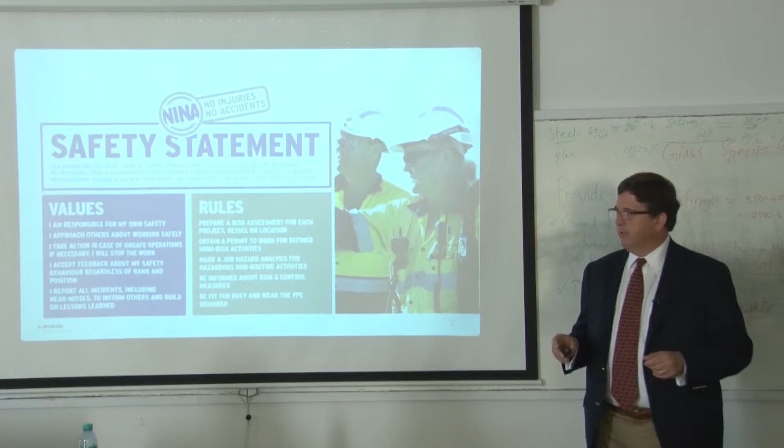Safety, of course, is important. All the dredgers, consultants, and clients emphasize that. You heard a little about hydrogen sulfide—when you get to the very contaminated material, you're also dealing with chemical risks. So one of the things we like to do is prepare a risk assessment for each project, actually looking at the activity you're going to do. The dredging has its hazards, but also when you do the treating, you want to make sure that as you're spraying the material in, you don't create an aerosol, something that can be breathed or absorbed through your eyes. These are things we get our safety people involved in, to really study with the engineers and the people doing the work. You get some of your best information from those actually doing the activity, to create a real safe environment while we're doing the projects.

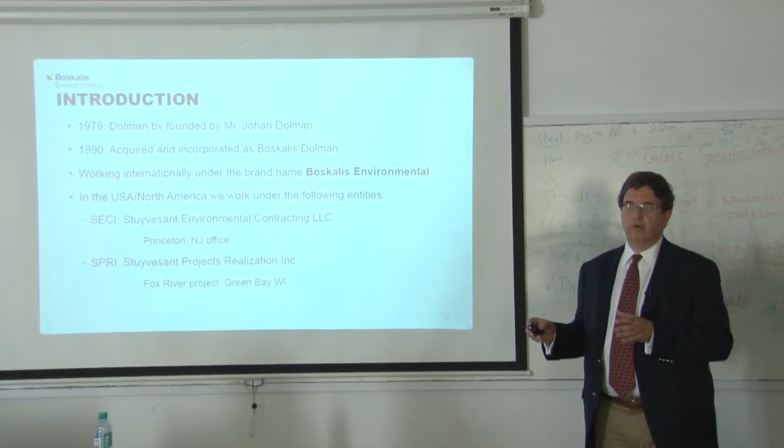A little background on us: we've been doing this for a little more than 30 years. Many know Boskalis as a worldwide dredger, but the focus here is really the group I'm in, the environmental group. In the United States and North America, we operate as Stuyvesant Environmental Contracting, or Stuyvesant Projects Realization. We're a specialty subcontractor solely handling the processing of contaminated dredge material—not dredging it on a particular project or tender. We team with a dredger, typically a water treatment company, and somebody to handle the ultimate disposal of the material.

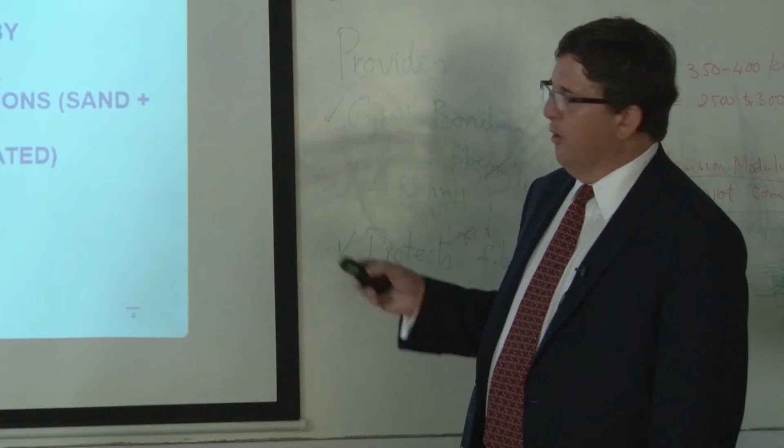The overall objective with contaminated dredge material is really to minimize the contaminated fraction. Both Renee and Tito pointed out that the material concentrates in the fine particles. So if you have a chemical engineering or civil background, the geotech properties are even more important to us than the chemical properties of the sediment—because once you look at your grain size analysis or particle size distribution, your highly contaminated materials stick to the fine surface area of the fine particles. That's the material that typically has to go for further landfilling, incinerating, stabilizing with cement, or chemical oxidation as you heard. So what we really try to do is physically separate the coarse material—the sand and gravel—and try to beneficially reuse it. I'll give some real life examples of how we've done that.

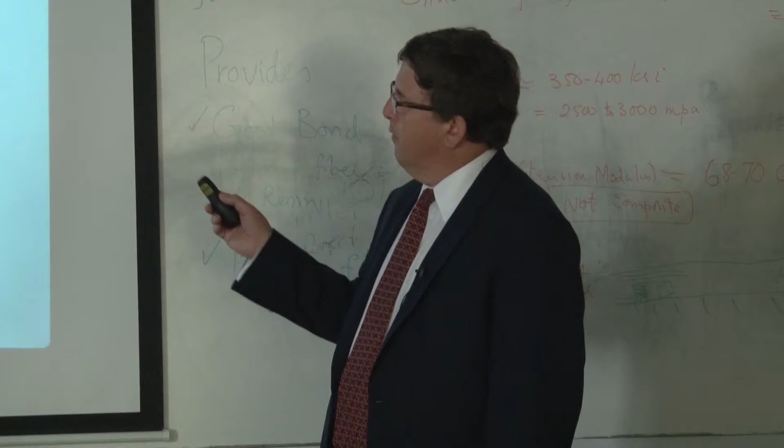Some of the ways we implement this technology: on a regional location where we have a lot of experience—in the Netherlands, being a small country, there's actually legislation preventing you from landfilling. In the US, we have large problems; we've got lots of land, we put everything in the ground, and that mindset is changing. Doing work in Canada, they're also looking at the sustainability of loading trucks and sending them through cities to distant depots or landfills, trying to see how much material can be recovered and beneficially reused on a particular project. We also get involved in specific design—looking at feasibility studies, like many of you consultants, the actual construction, and making it compatible with other technologies.

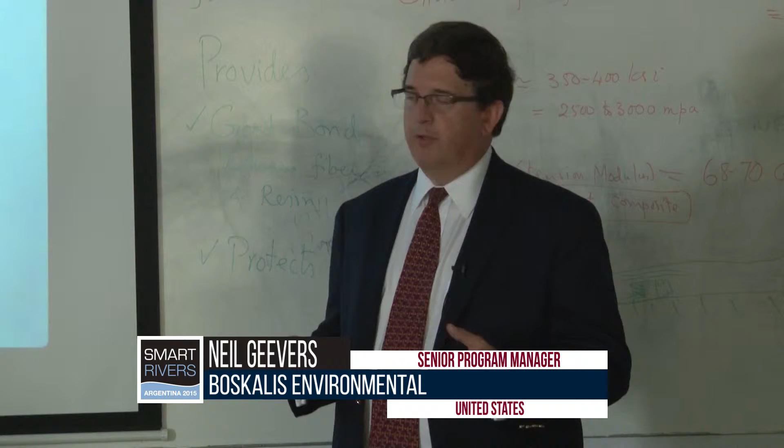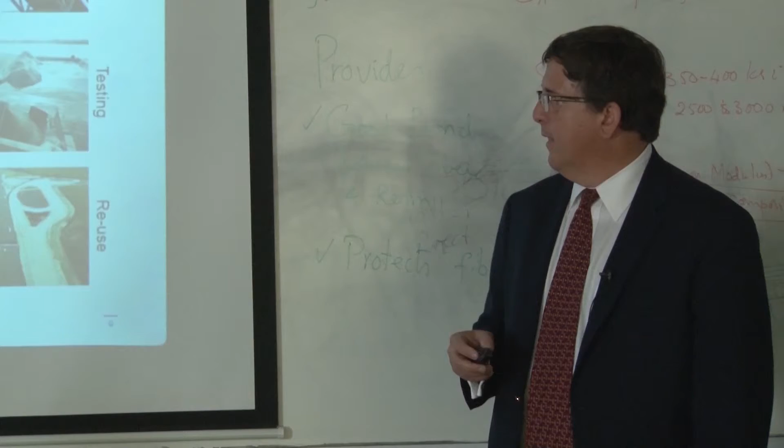It's a simple physical technology, and I'll touch on the actual techniques. This is a regional management facility—we have one in the Port of Rotterdam, in Schiedam, a facility that's been there for 20 years, where basically we accept the materials. A lot of our background came from soil management—treating soil from excavations of construction projects, building new highways, et cetera.

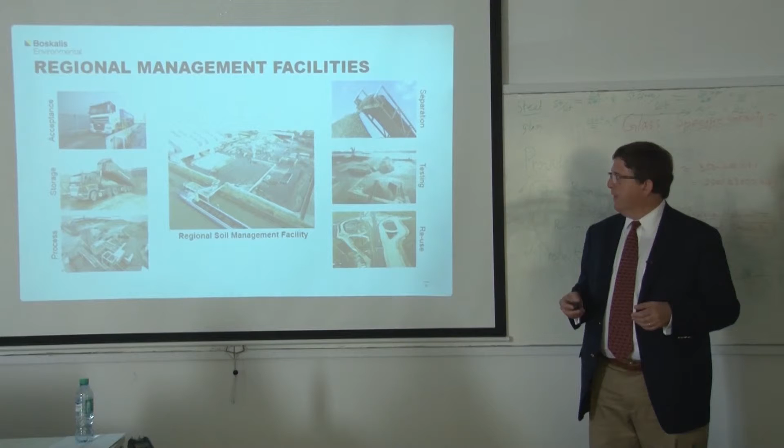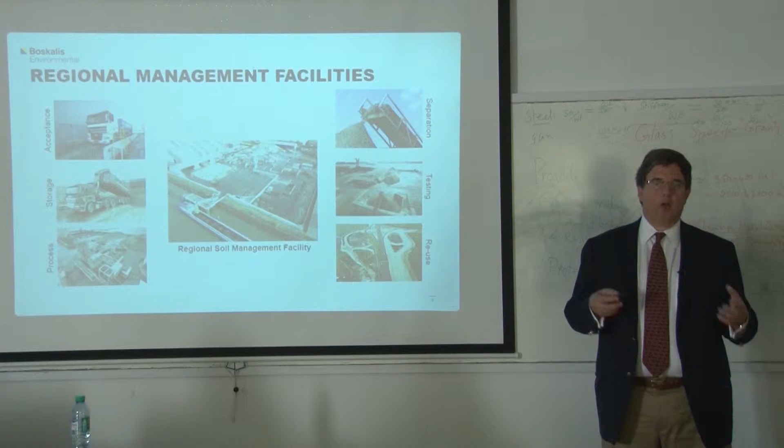And then again, recovering the sand. In the Netherlands, these are valuable commodities. Instead of sending stuff to landfills, the legislation actually encourages you to first look at reuse. Many countries talk about that, but there it's a real proven fact that first you want to try to recover the material. This includes separation steps, testing, and then ultimately being reused in a project, whether it's on the A4 highway or in a construction project.

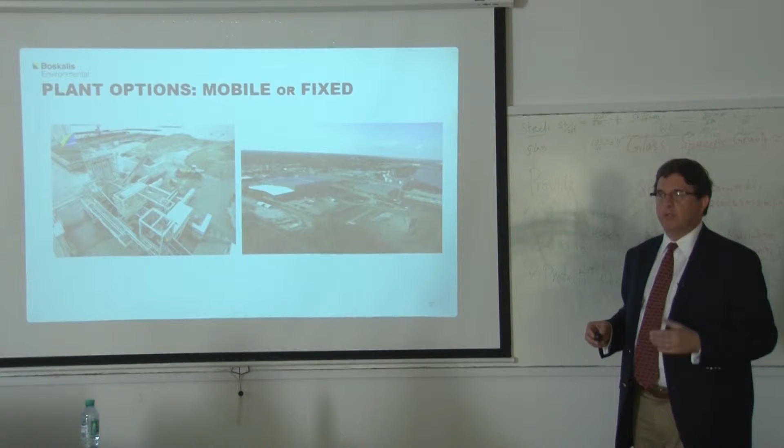In the 70s we had our Earth Day. By 1980 we finally had some hazardous waste legislation, followed by our Superfund, which addresses the really bad sites. First we addressed soil areas, source material, groundwater, and now the next frontier is really sediments. Everybody's starting to look at what's underwater in many of these ports.

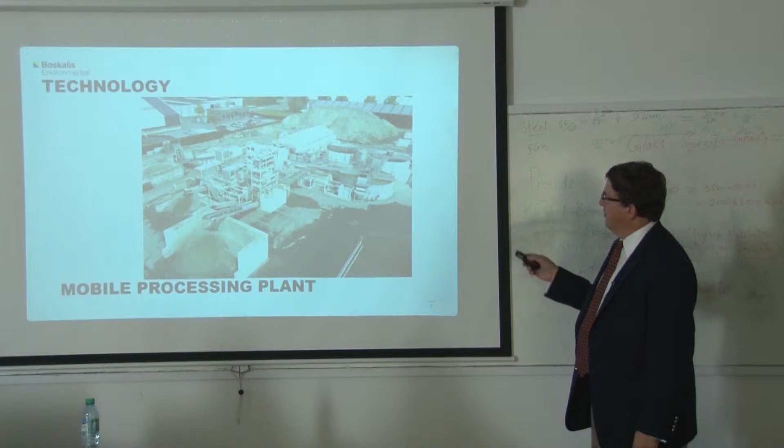The technology, as I said, is a simple physical separation. This is again the system with different conveyors and tanks, and ultimately clean sand in the back there. Here's how you can feed it, with a simple wheel loader.

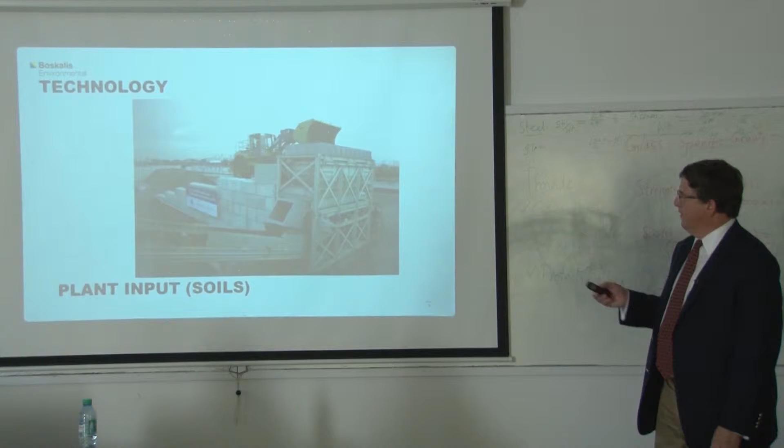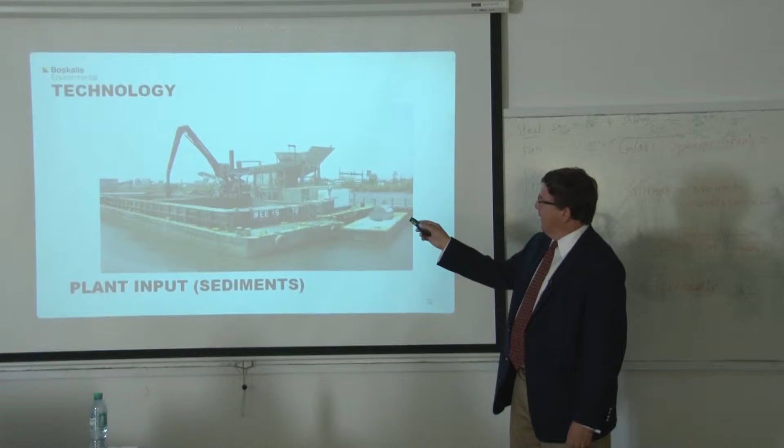So this is how we do it at our soil plants. You could do that with sediment, but I'll show you some examples on how we do that. This was a particular project in New Jersey on the Passaic River, a very contaminated river, where basically we fed it from that excavator, a long stick excavator, into the feed hopper up there.

And then from there it was actually pumped to the treatment system, let's say 2 kilometers away, by just a pipeline under high pressure, double-walled pipe, so that there wouldn't be an escape of material into the environment. So there's many different ways to feed it, and a lot of this uses very proven, common techniques.

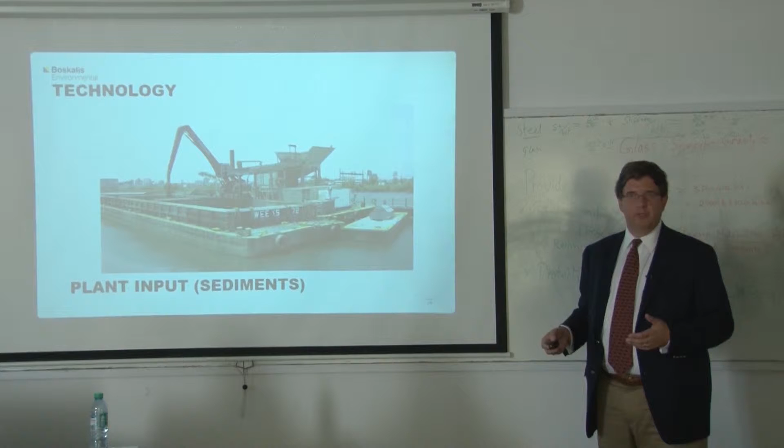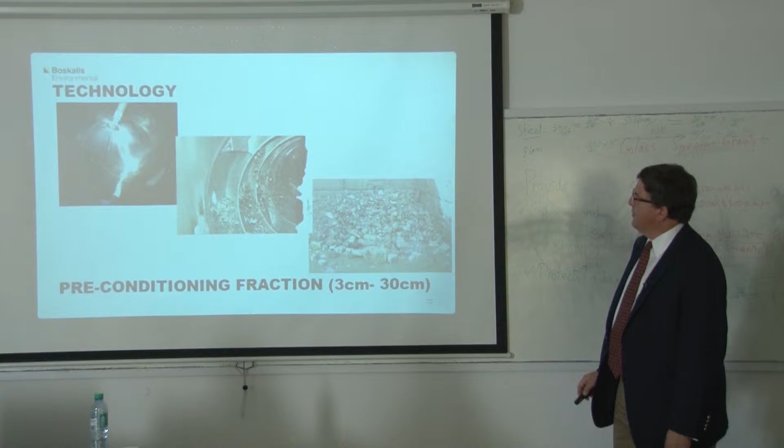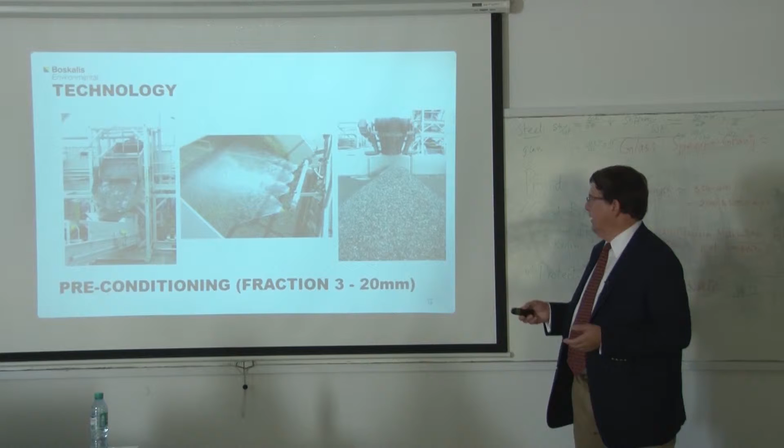The preconditioning step is where we look at the larger particles, 3 centimeters to 30 centimeters. You see them washing out there at the bottom from a rotary drum. Then we also do some more spraying again with water. We recycle the water through our process, and here's another preconditioning step, getting to a smaller material.

Then ultimately through hydrocyclones is one potential way to do it. Sand separation down to 63 micron up to 3 millimeters. Again, simple basic units that are available that have been used in other industries for some time.

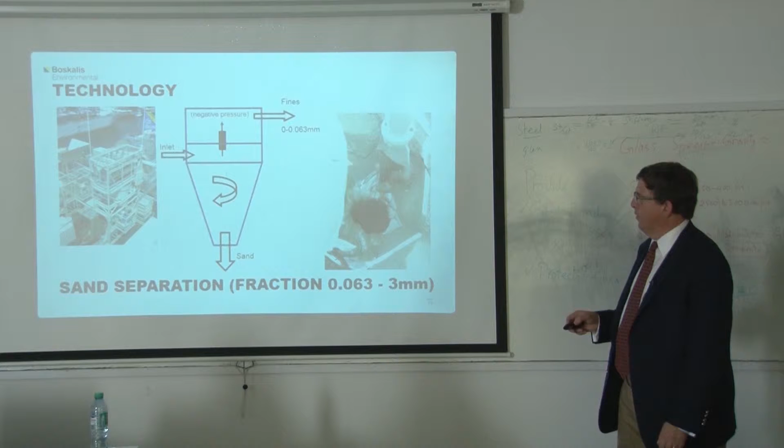And basically then you have your separated sand fraction, and I'll show a real life example of a project where we were able to then beneficially reuse that sand in a local infrastructure project.

As you get to the fine material and then you add polymer, you see just how dark it is over there, and once you add the chemical, how you're able to concentrate the material. And then from that thickening step, you then would go into either a plate and frame filter press.

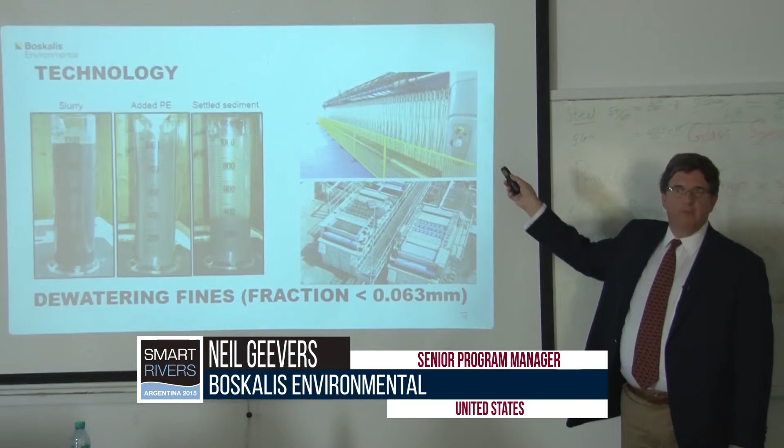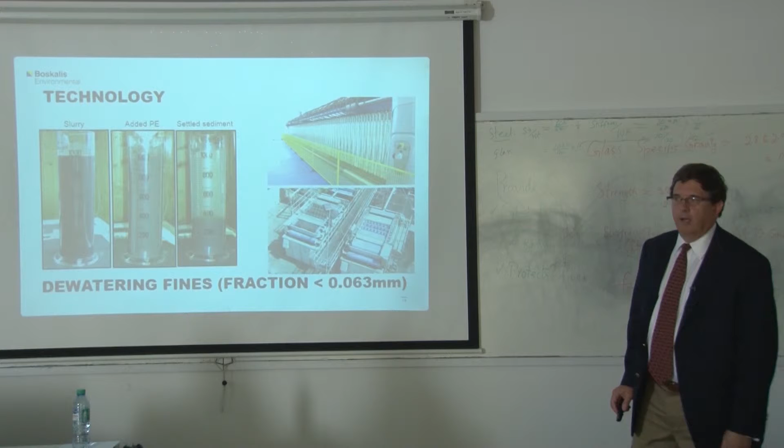These have been used again in the chemical industry, from olive oil to the paper industry. And then down below are belt filter presses. Again, standard equipment that's been around, whether it's Siemens, US Filter, GMA, Bill Finger, those kind of companies. Proven - a lot of it comes from the water and wastewater treatment industries as well.

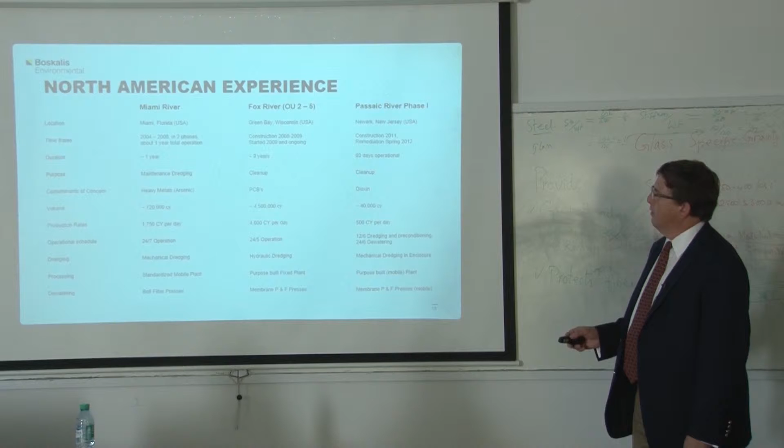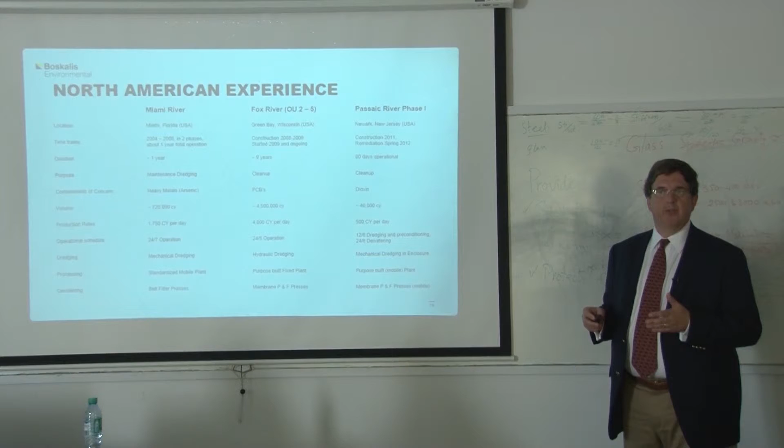This is our particular experience with 3 different projects that I'll touch on: the Miami River down in Miami, Florida; the Fox River, which runs in the middle of the country and empties out into one of the Great Lakes; and then the Passaic River, which empties out into the New York, New Jersey harbor, right by New York City.

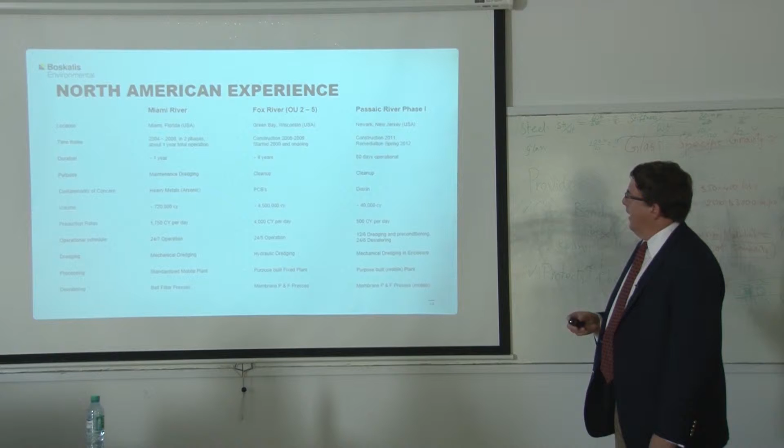Basically different time frames, everything from an 80-day long project, just a small hotspot where the real contamination was concentrated, to the Fox River project that I'll be visiting again in 2 weeks. That one has been going on for 7 years and probably has 2 more years of work to be done. The first one in Miami was maintenance dredging, which you've heard about. The other two are pure environmental cleanup projects to handle high levels of pollution.

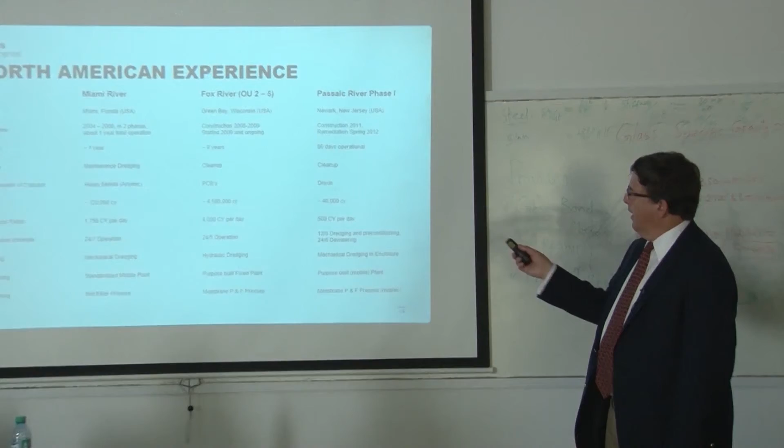Heavy metals in some cases with arsenic, PCBs which come from electrical equipment - they were an insulating chemical, a long chain carbon compound. And then dioxin, which was actually used in the production of Agent Orange, used in the Vietnam War to destroy the jungles during the war.

That particular plant has, as a legacy, all of that material dumped into the river. Environmental practice in the 60s and 70s meant many facilities were demolished and just pushed over the quay wall. So you find a lot of debris material, which I'm sure you're familiar with in all dredging projects. But when it's contaminated debris, that adds a new level of difficulty.

Processing rates could range from 500 cubic yards a day, done almost surgically, like a medical procedure, very carefully because of the high contamination, not wanting resuspension or turbidity. The dredging was actually conducted within a sheet pile wall, as mentioned.

Silt curtains often have their own problems. If it's a river with high current, you have the curtain moving around, and that has impacts too. Right up to the Fox River, which runs about 4,000 cubic yards per day.

So it's a very large project. We can take the material for treatment either from mechanical dredging or hydraulic dredging, as you saw examples. There are times we've used a mobile plant like in Miami. For Fox River, we've used a larger full-scale plant for many years, built for 10 plus years of processing.

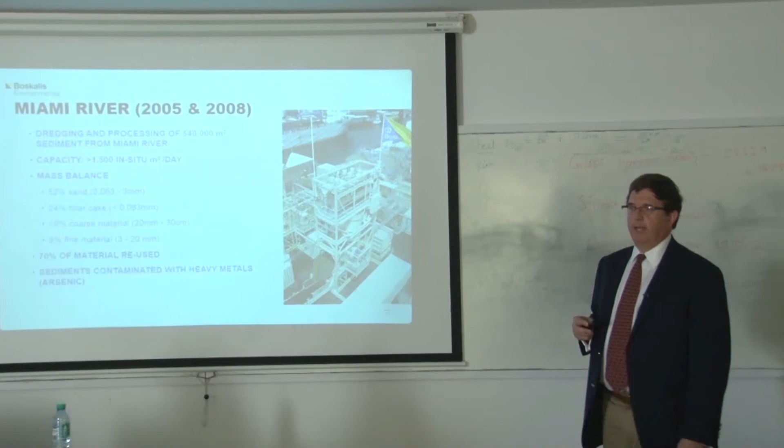To touch on the Miami River again, this was basically a very sandy river, so lots of good recoverable sand could come from that material. More than 70% of that dredge material was reused as either landfill cover or used in construction projects.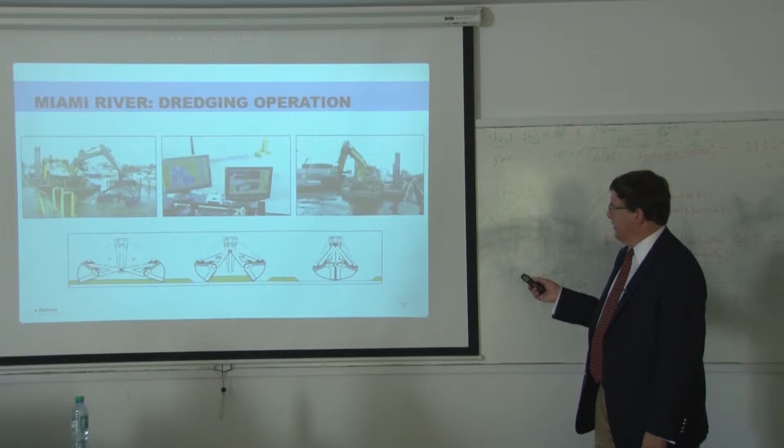You heard about the horizontal grab bucket and also some of the GPS controls and how fairly accurate they've become with that technology. That's certainly commonly used on projects such as the GE Hudson, General Electric's project, which uses these kinds of buckets as well.

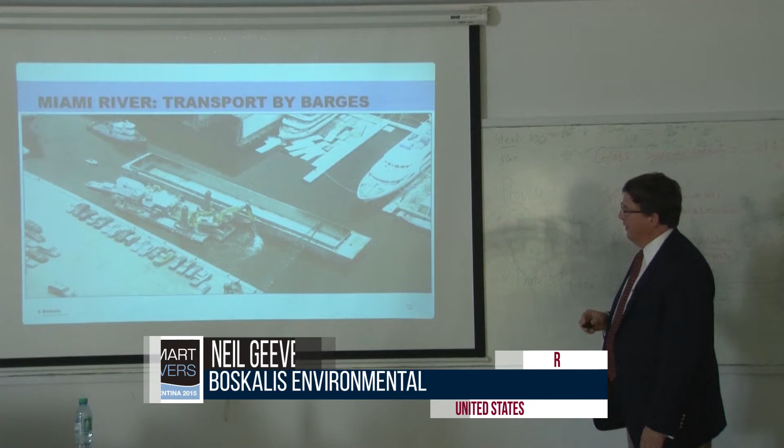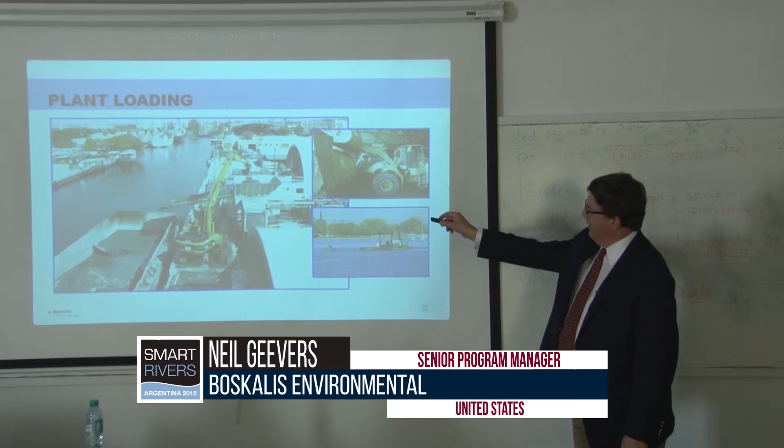You can see very tight quarters here, with yachts nearby and a very small, tight little area to work. So we had to dredge, then load it into a barge, take the barge down to where it would be offloaded for further treatment - you have to worry about the logistics of how you're going to do that. As we moved that barge down, we had to use the long stick excavator to empty the barge and load it into our feed hopper.

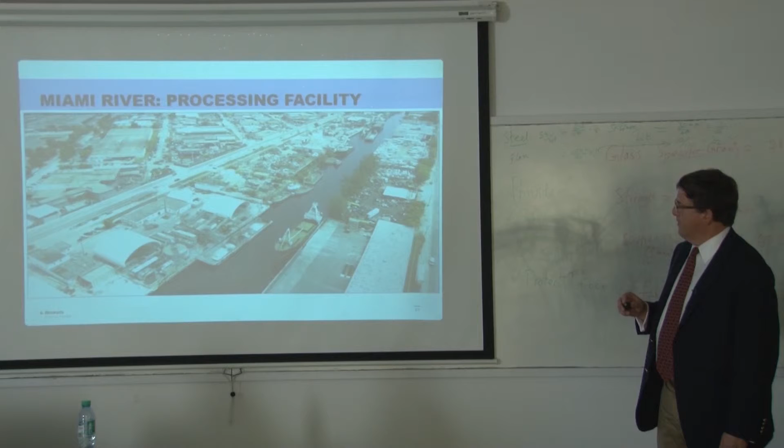You can get a feeling of just how narrow that river was. As Renee said, some of our experience started in the canals of Amsterdam, where you will find bicycles. Here we found some other interesting things, which I'll mention in a second.

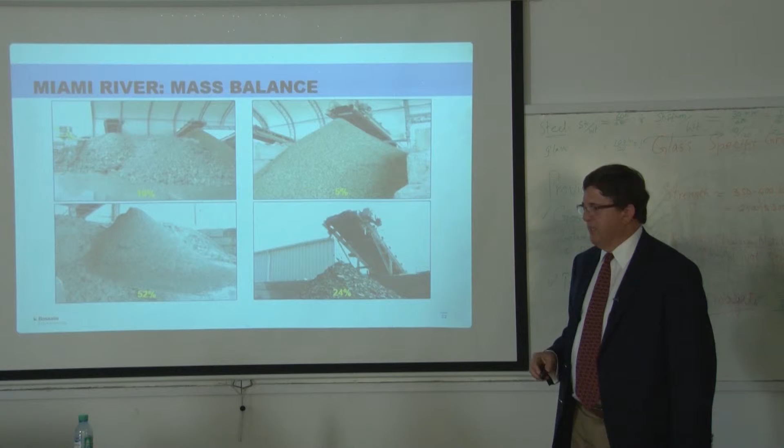The overall mass balance, as I said, was mostly recoverable sand, not a lot of fine silts. 24% of the fine material ended up as filter cake, and that had to go to a landfill. We still haven't found a beneficial reuse of filter cake - that's basically where all your contamination is. So that's going to a secure landfill.

These are some of the interesting things we found - basically grenades, some missiles, unexploded ordnance, what they call UXO. But we also found a lot of guns, just like in those TV shows like Miami Vice - when they're being chased, everybody throws a gun off the bridge. So that's another American thing, right? Anywhere you go in the water, there's guns.

So that was interesting. You also have some large hurricanes that seem to like to aim at Florida, so we had to take down our process and then put it back up when it was safe for everybody to work.

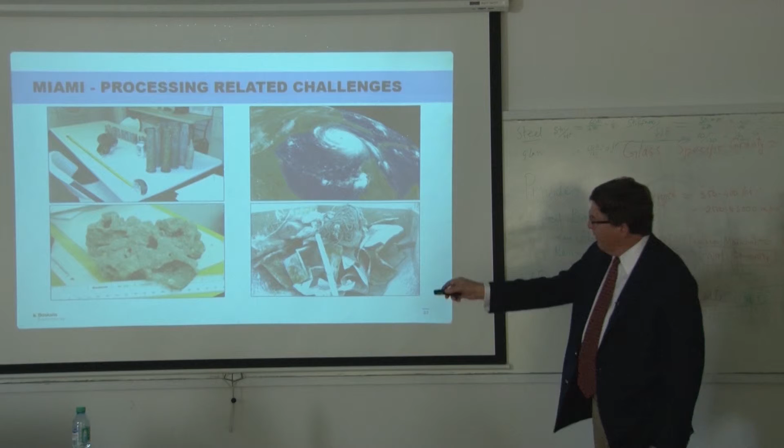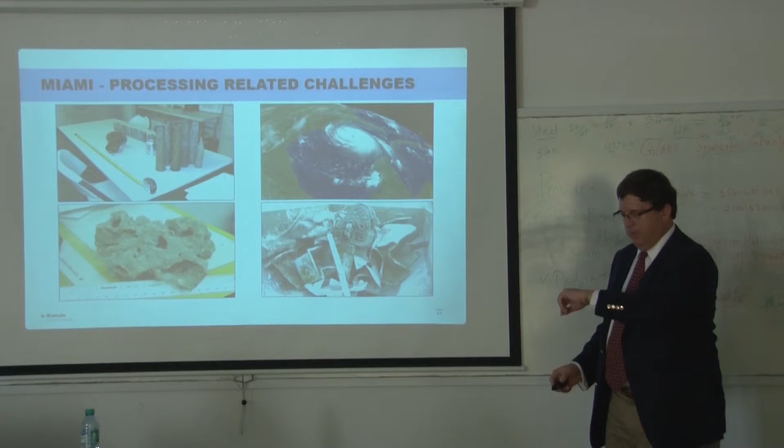On the bottom left there are large pieces of coral, very hard material, and then just general debris. You can expect any harbor that's operated for that long to have a lot of debris.

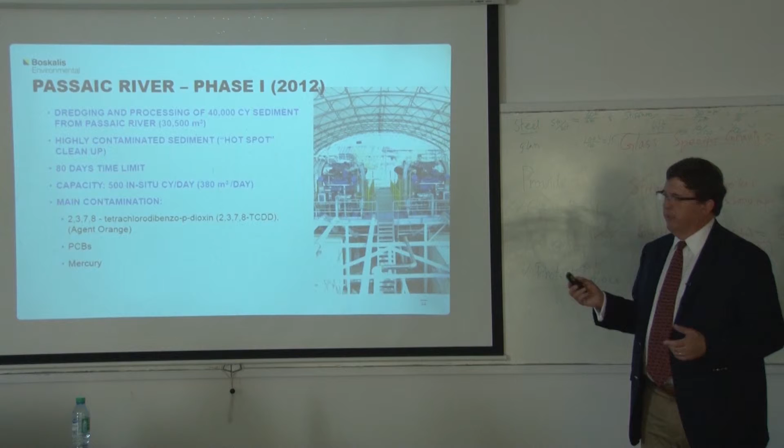80 days, 500 in situ cubic yards a day, or 380 cubic meters, let's say. That was finished in 80 days, but that's only the beginning of that cleanup. That river right now is being considered by EPA for a much larger cleanup that could take 10 to 15 years.

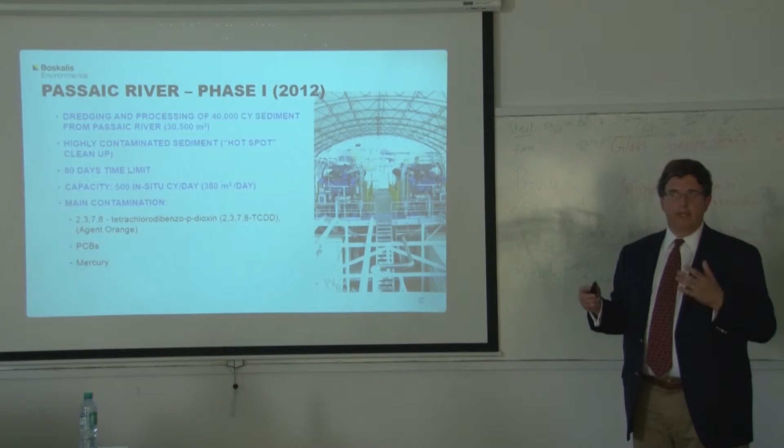One message I want to give is that we have big messes and we try to solve them in a big project way. The benchmark has been raised to almost 500,000 cubic meters per year of processing capability. Initially everyone felt it couldn't be done, that it would take 30 years, that there isn't the technology or equipment - but actually we're showing it. Other companies have shown it too, like at the GE Hudson project. So we now see projects like this more and more as being possible.

Getting the people to pay for it is the other situation, and that's another American thing. We have a lot of lawyers, so they find a way to get the money from the people who caused the pollution, whether or not it's a recent problem or something that was there 50 years ago. If the polluting company won't do it, the government will sometimes do it, and then go after them afterwards to collect the money later.

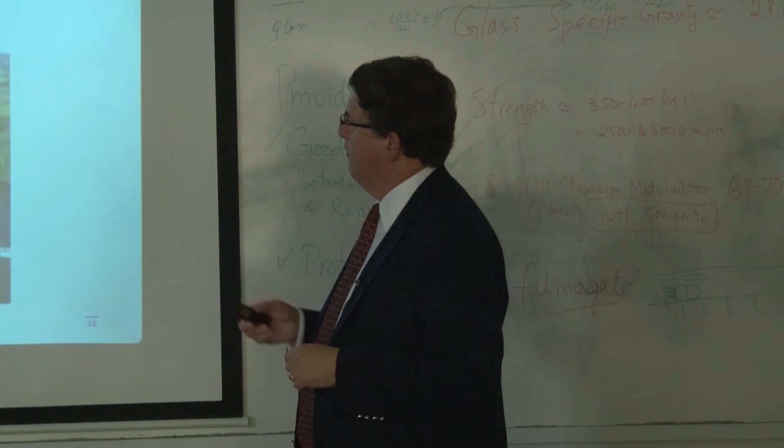Fox River, a beautiful area of Wisconsin, kind of like America's Dairyland - that's where they have all the cheese and the cows. That's where we've been for 7 years: a 21-kilometer river, 4.5 million cubic yards or 3.4 million cubic meters.

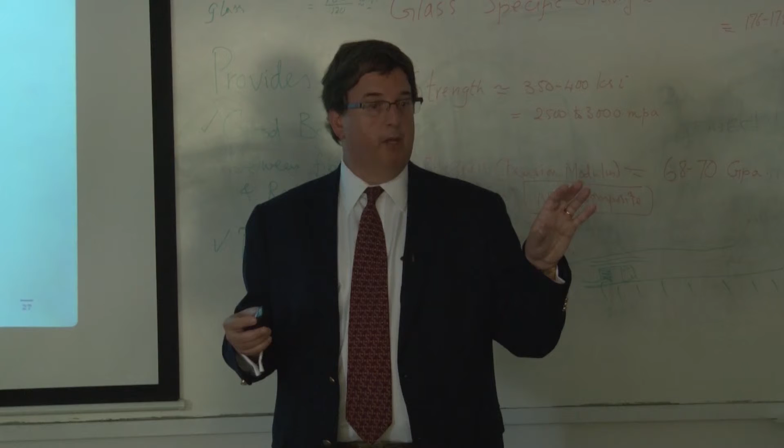That's how much we're processing per day. It's a fully integrated project from characterization, design, and that's the way I would encourage consultants and clients to look at their projects - all those different factors together. It starts, as the previous gentleman said, with properly characterizing what your problem is, not only chemically, but from a geotechnical point of view, and then looking at what's the best equipment for dredging.

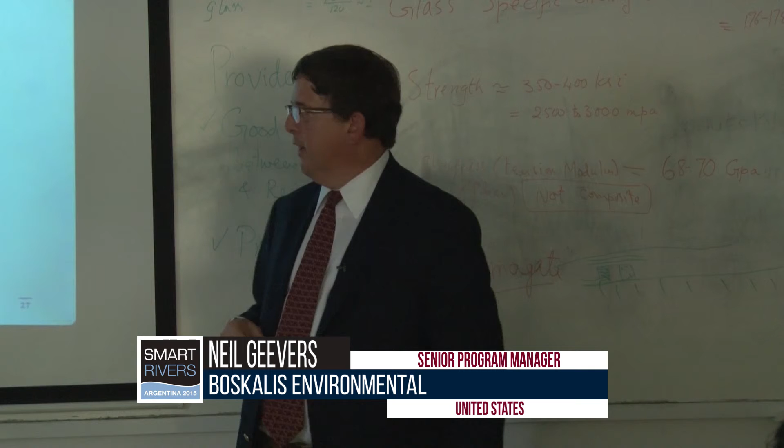Do you want to pump it? In this case, they pump 12 miles with booster stations every 1 mile. Then you have to put proper Coast Guard markings so people on a ski-doo don't hit that while they're slaloming through there. These are all the different considerations when you do a project - there's water treatment, the actual treatment and disposal, and reuse of the sand.

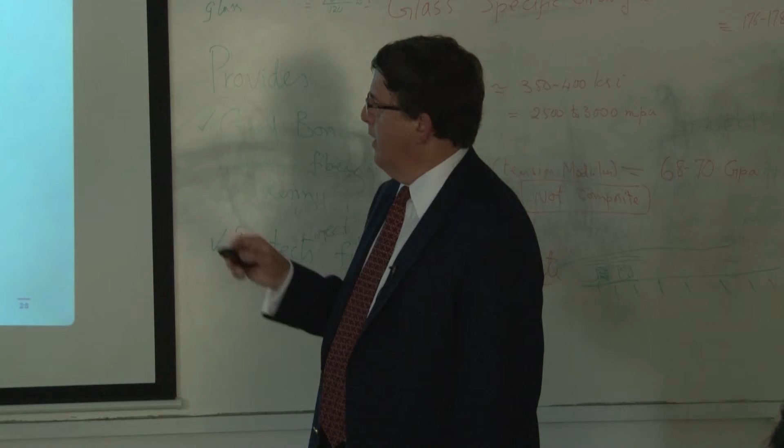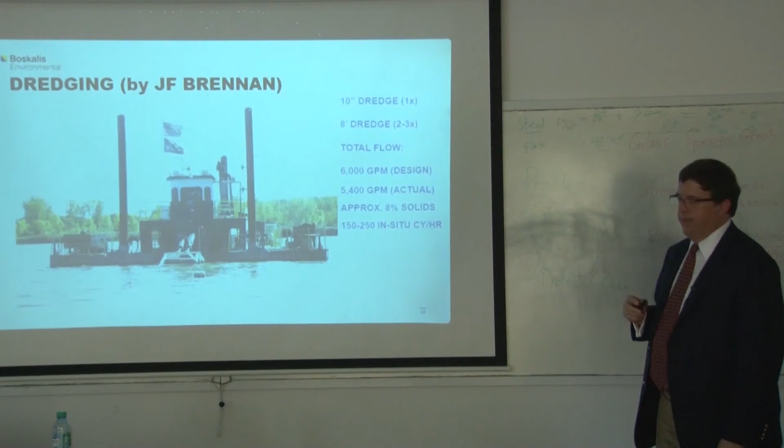This is what they brought: one 10-inch dredge and two, sometimes three, 8-inch dredges - that should be 8-inch, not 8-foot. 6,000 gallons a minute was the design, pumping at about 8% solids. We looked at the whole river and the sequence, moving from the most contaminated to the least contaminated, in a downstream fashion.

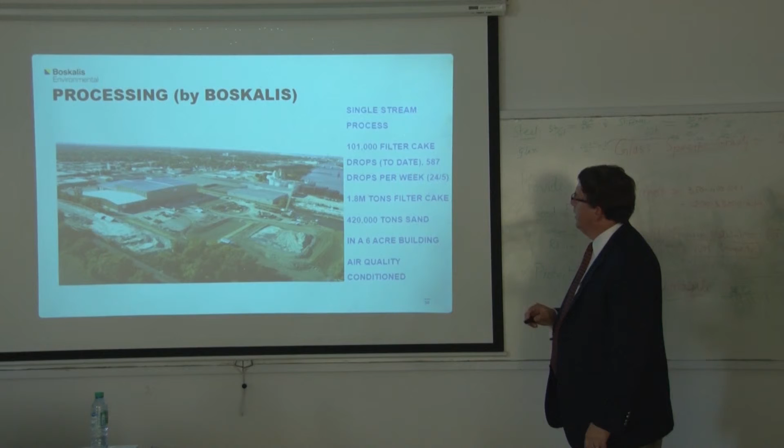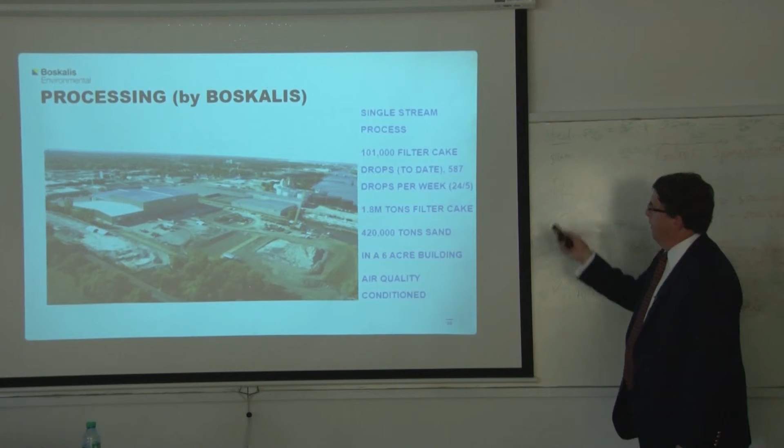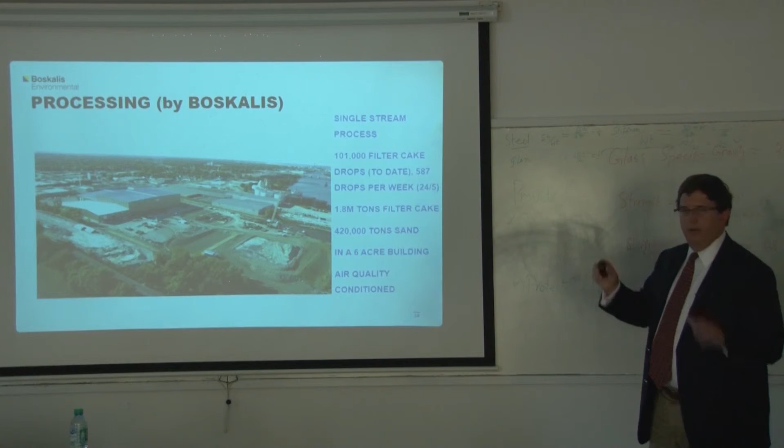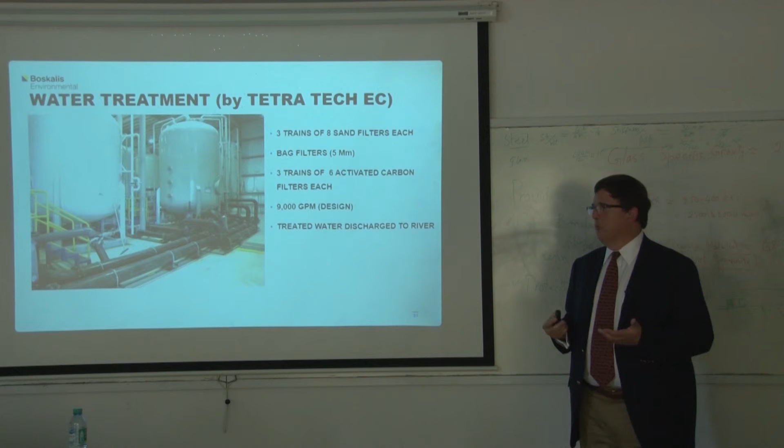This was the building that we actually built, where their dredge lines come in - these are the pipes feeding directly into our system. Pretty impressive: 1.8 million tons of filter cake, 420,000 tons of sand, all within a building of 2-3 hectares, air conditioned and controlled. The material comes in, gets screened, dewatered, treated, and then filter cake drops into trucks to go to the landfill. Water treatment is also a big component you have to look at - while you wouldn't use water injection, hydraulic dredging certainly generates a lot more water than mechanical dredging.

So while it may be an efficient way of almost vacuuming the contamination very precisely, you do then have to add a lot of cost for the actual treatment of the water before you can discharge it back.

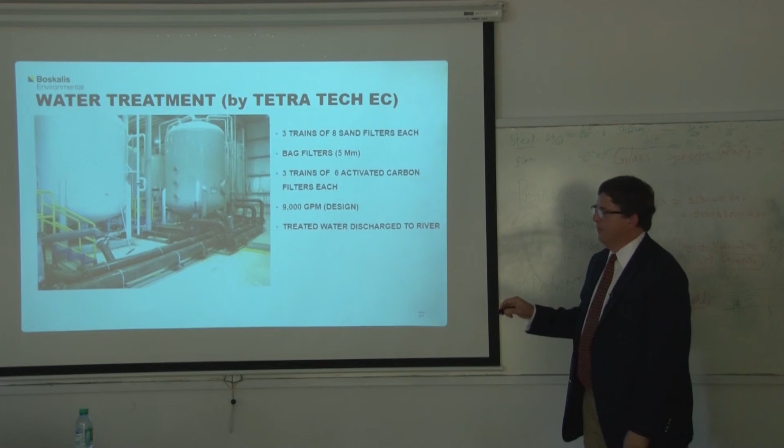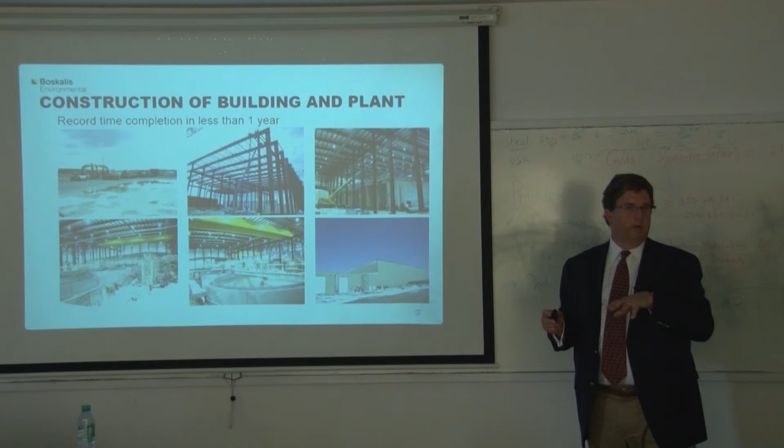First step, we start with a treatability study, actually collect samples, again look at the chemical characteristics, look at the geotechnical. Then this particular facility was built. Now, not every project is going to need something this large, but this just gives you an idea that you could have a regional center that could handle all of the materials within a port.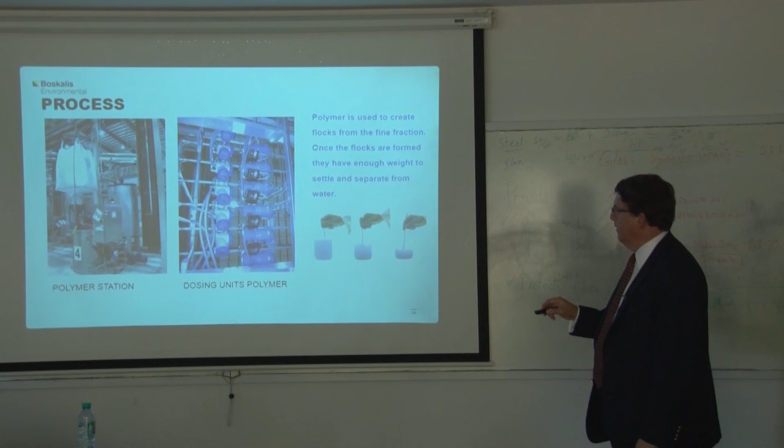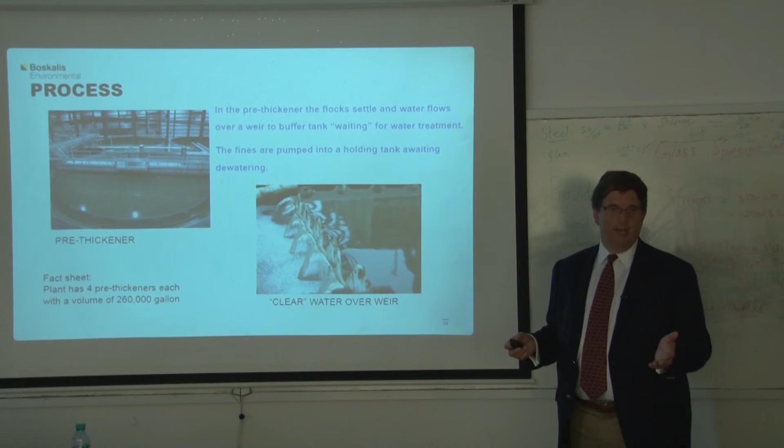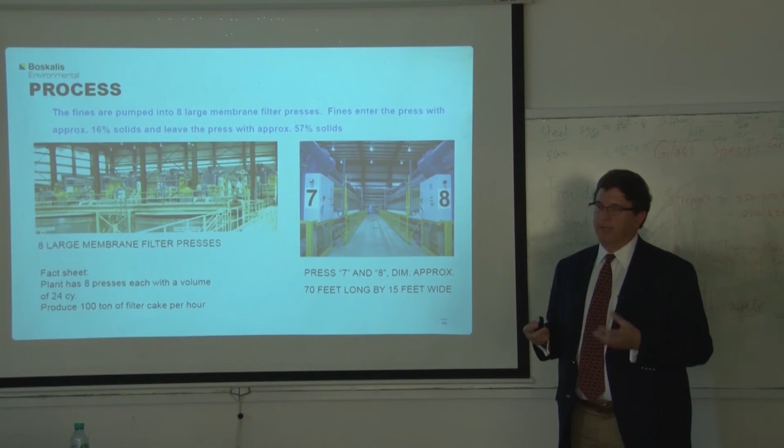That's your contaminated material. Through a pre-thickener tank, again very large size. The water that comes off is clean, so it can then go through the treatment process back into the river. We also recycle as much as we can for different wash down parts of the process. Basically generate solids of 57% when we're all said and done, and that saves the client rather than shipping moist material. Basically it goes out as a dry filter cake.

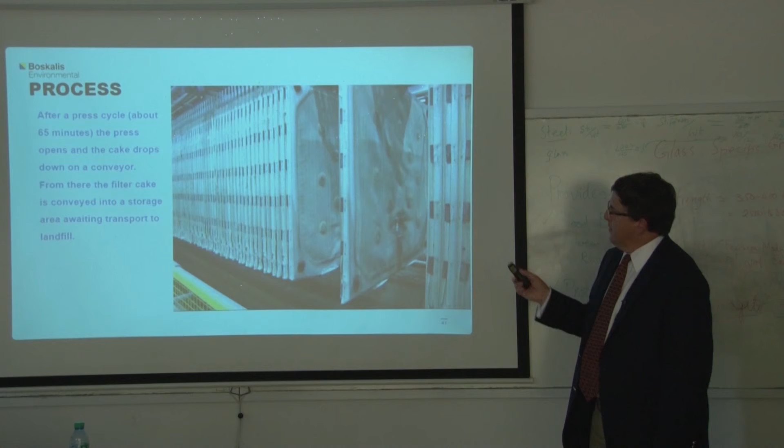We have 8 large presses. Those particular ones are made by Andritz in Austria. Cycle time about 65 minutes each, and then after this thing opens up, a 2-meter by 2-meter cake actually drops down into a conveyor.

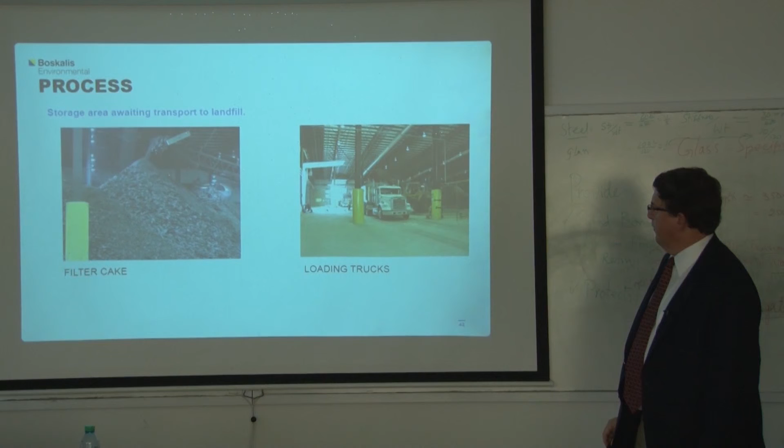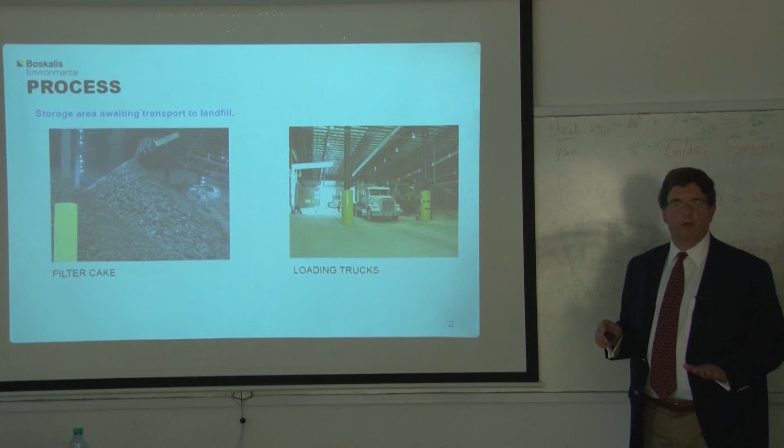And then out there it comes as filter cake on the left, loaded in trucks. The truck comes a little closer to me and right away gets water sprays all on the tires and everything. We also follow the trucks to make sure that they're going the right speed near schools and all, because you have a big impact on your surrounding community.

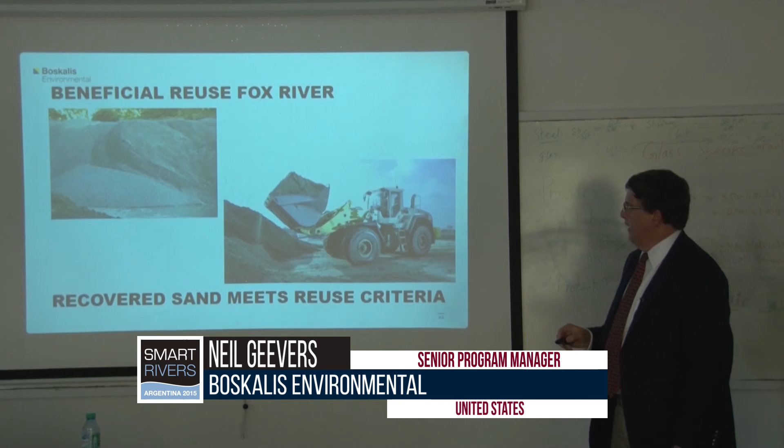Beneficial reuse, the last thing I'll touch. And basically, one of the only projects we know of in the United States where they're actually reusing this sand, catching up to the Netherlands 30 years later. You want to remove sand anyway because it reduces wear and tear on your equipment, right? Your pumps, your valves, piping. And there's different opportunities, and then you avoid using landfill space. So it's a good cost savings, but it also makes good sense.

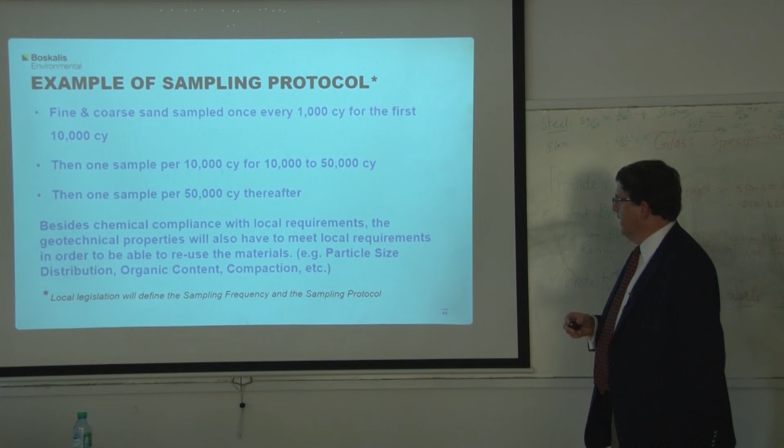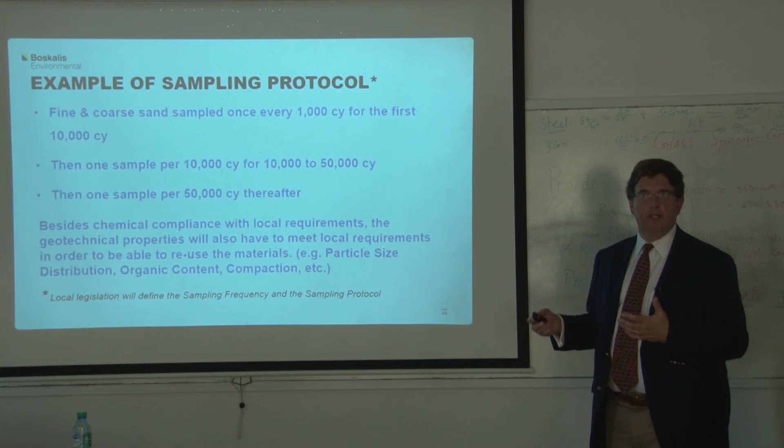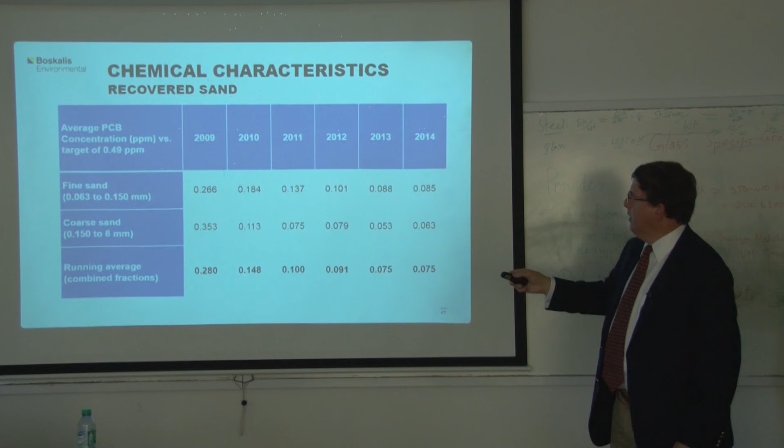So looking at how clean is clean, how clean do you have to get the material? Well, this is how clean we had to get. We had to basically get down below 0.49 parts per million, milligrams per kilogram. Okay, and basically from the fine sand to the coarse sand, our running average on the bottom has been well below that. So this allows that material then to be unrestricted, used in construction projects. And again, just from a physical separation, no magic chemicals or incinerator or anything like that. It's just good quality sand with the contaminants going out in the fines.

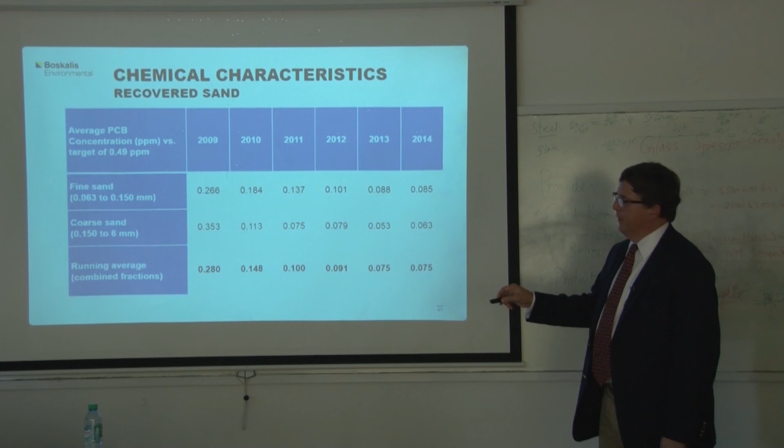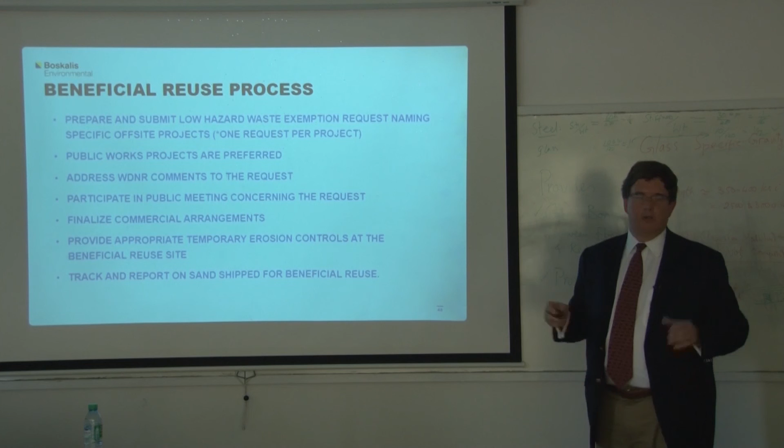There's a process we had to follow. You had to have public meetings. You had to provide paperwork. That's not going to be as relevant to you. You'll have your own process in your particular country. But that was to get the regulators to approve and to allow the client to safely take this material out.

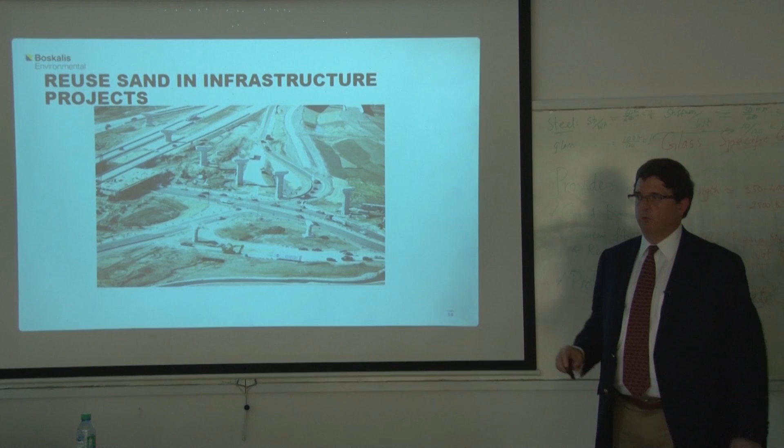This didn't come out too good, but Green Bay empties into Lake Michigan, and basically this is where our sand was going, into an actual highway project where it's used as the road base. So perfect use of that kind of material. And that's it.